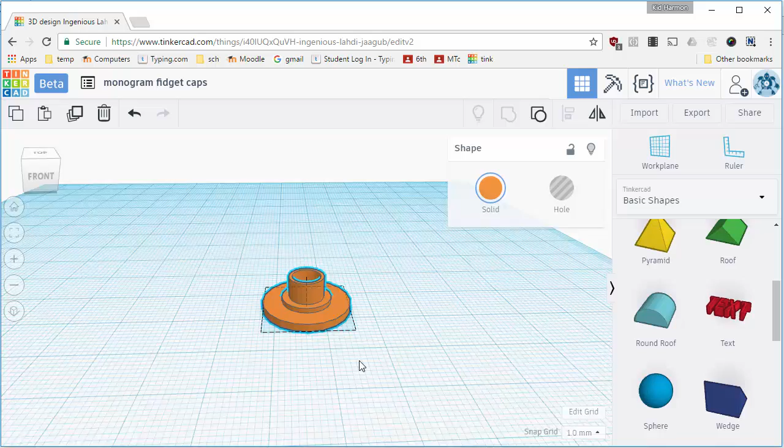Good morning, fellow tinkerers. I'm going to show you how to make monogrammed fidget caps.

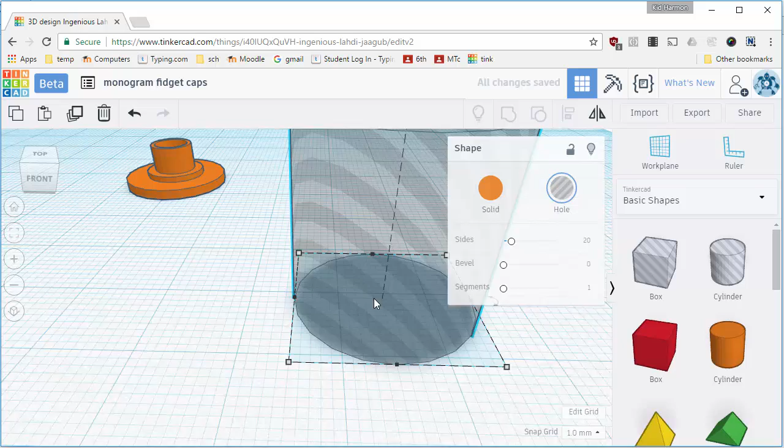Put your initials right in the center of your caps. We need to do it like this so that it's easier for it to print. I'm going to move this little dude off to the side and let's get started for how to build this. Start with a cylinder and also understand that you're going to put the letters upside down.

Make that cylinder a hole and change its measurements to 18. Remember to press enter. Press 18 again. Remember to press enter. And then for this one, we want to go 1.5 millimeters thick. Later, we're going to make our words 1 millimeter thick. That way they do not poke through.

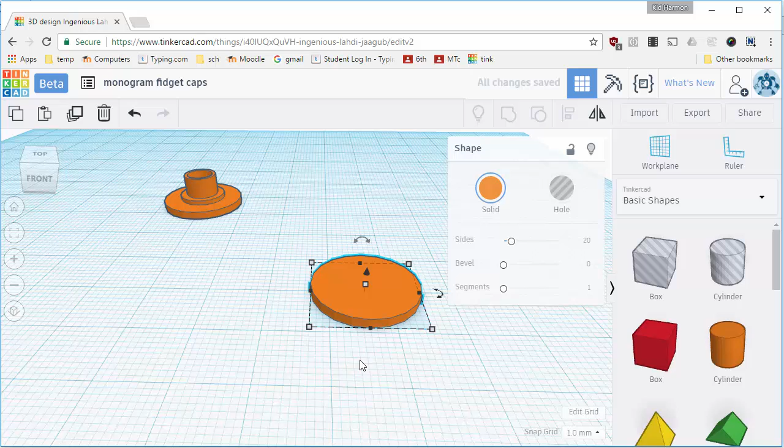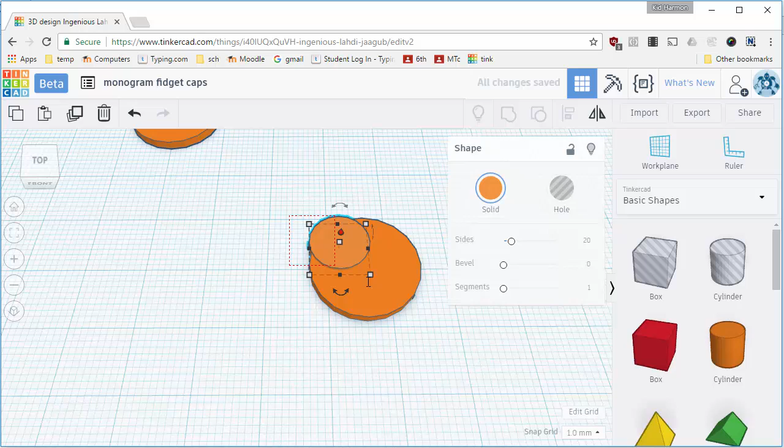Do Control D to duplicate that little critter and make the next one 10 by 10 and press enter. And then we want to make it 2 millimeters thick, so that way it gives us a raised up area when the spinners are going or touching the bearings. Use the awesome align tool to center it.

This tool is really cool for zooming to the exact size and looking from the top to make sure that you've got it the way you wanted. Then I always switch back to the front view because I prefer that. And now let's create one with a pin and one with a socket. Click somewhere else so you can get just on the center piece and do Control D to duplicate it.

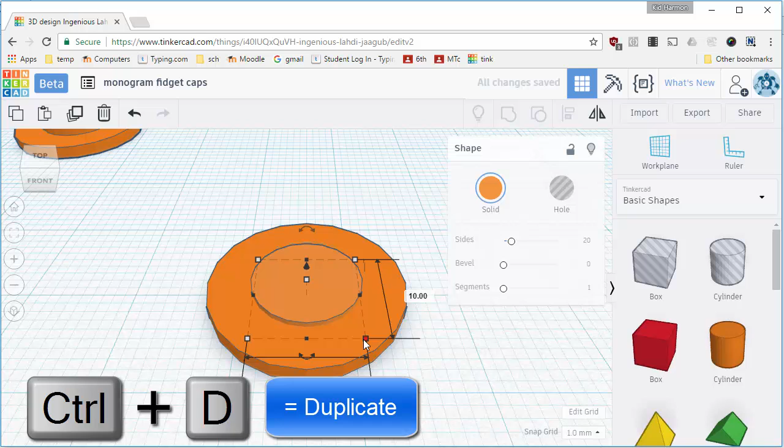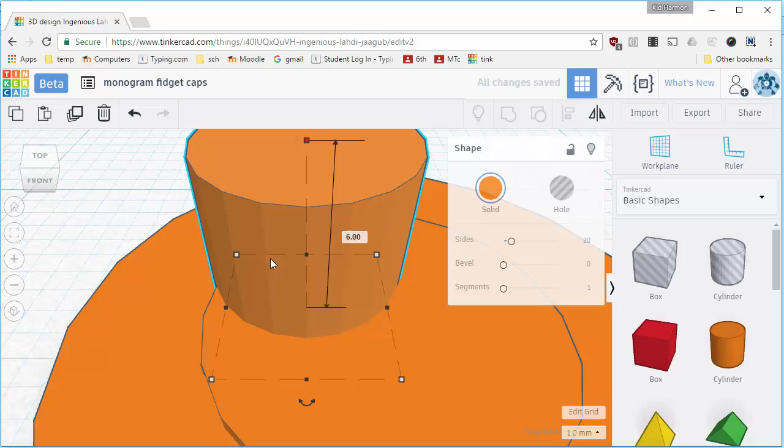This one we are going to change to 5.75 and 5.75. Make sure you press enter after you type those. And then we want it to be 6 millimeters high. Click 6 and press enter. And then zoom back out if you accidentally did what I did. I'm going to go top view so I can easily grab everything. I'm going to align those and center them.

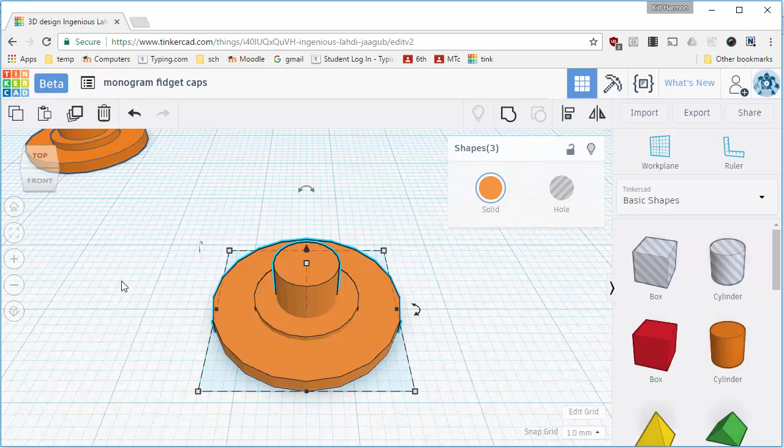Make sure when you do your align tool you've got everything selected, and when you do that fit view to selection, notice it moves so you are perfectly oriented and you can tell for sure that it is centered. That piece is now completed. So let's do Control D and use that piece to build our next piece. Slide it to the right.

And let's take our completed one and let's group it before we add the letters at the end. So if you wanted one without a monogram, right there's your spinner. This one we need to add a hole for the pin to go in. So let's start by making our cylinder larger. Let's do 7.8 and press enter, and 7.8 and press enter.

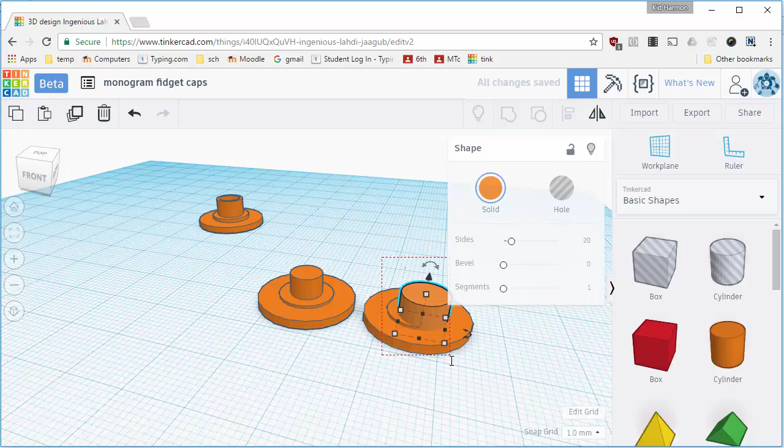Let's get those selected. Look from the top, choose align, click your line, click your line. Notice that is perfect. Let's click on just the center pin and change it to 7 high. Let's do Control D to duplicate that center pin. And we want to raise this one up 2 millimeters because it's going to be the hole.

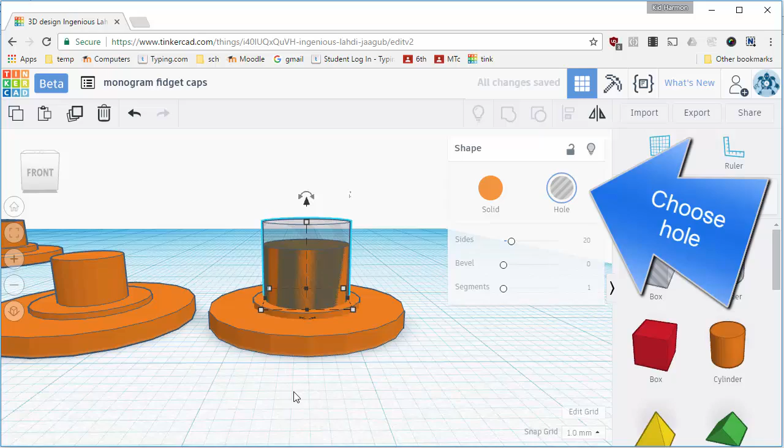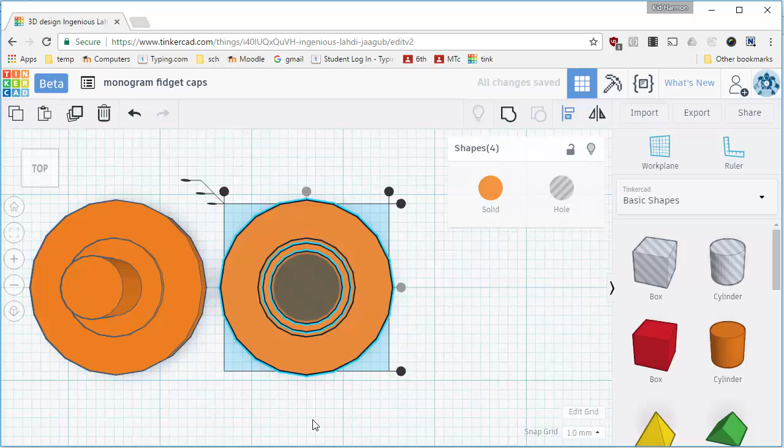Change it to the hole right now. And we don't want to cut through here because later we're going to put letters there. Change its measurements to 6 by 6. Select everything again. Let's look at it from the top. Let's do that real cool fit view to selection. Use align and pop those where they need to be. Notice we don't want to do this alignment because then it would cut out everything.

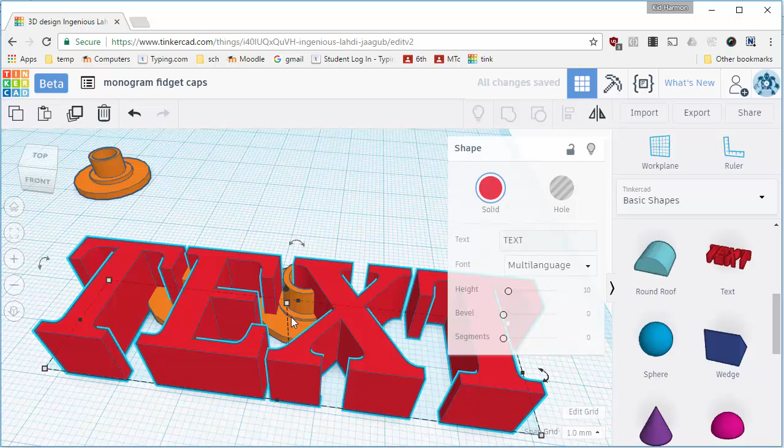You have just made your 2 cool caps. Let's group that so now they're ready. This one will stick inside here. And now let's do the monogramming. Find your text tool. Change it to be your initials. If you want to play with the fonts, you can. My initials are MH. Don't worry about the size.

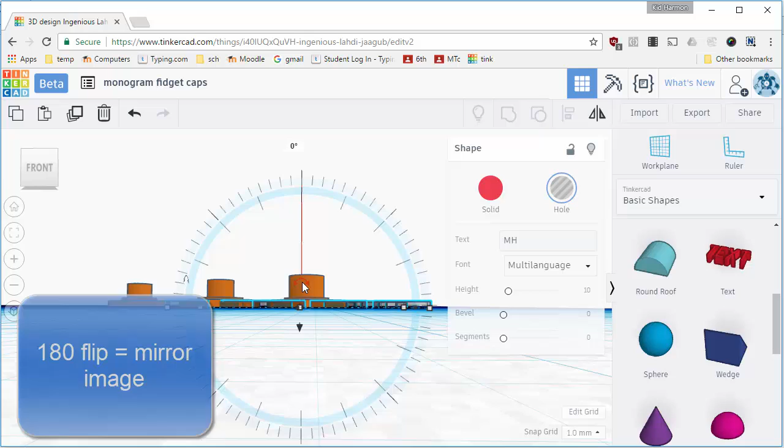Turn it into a hole. Change the height to 1 millimeter thick. Remember we went 1.5 millimeter thick on the original. And then we've got to change the orientation. We need to flip it 180 degrees so that it's backwards. And then later, when we flip these caps over and stick them where they belong, they'll be the right way.

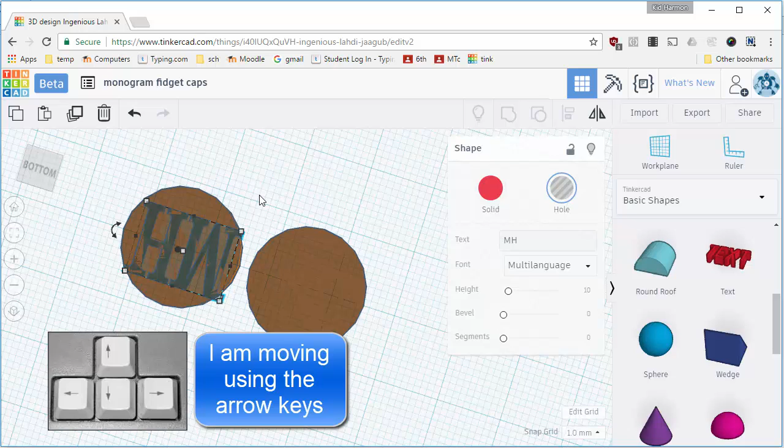Use the black handles to shrink it so that your letters are going to fit. You can move it from underneath so you can see it better. Notice that's a little bit too wide, so I'm actually going to work upside down. If you can't do that, just move your item out. When you've got it groovy, center it. Make sure you really dig it.

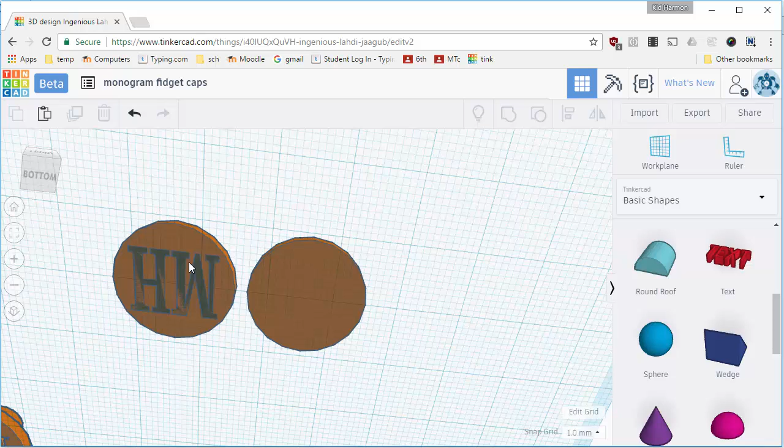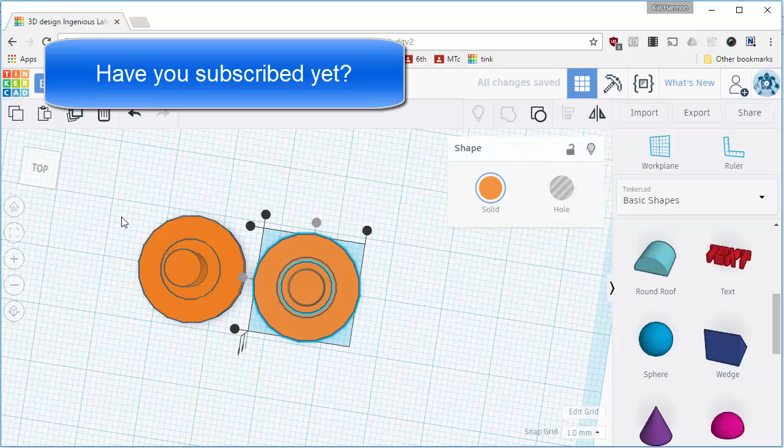Then do Control D to duplicate your letters. And move your letters over to the other one. And select all of that. Double check your alignment. Mine was already good. And now you can group your final parts. Cap 1 grouped. And now it's time for cap 2 to be grouped. And you can do it by hand, or you can use the cool little cube to switch.

When you look at them from underneath, you have now got initials with your caps. You can export everything, so both caps print at once. Of course, I would have a bonus one, or you can just do them one at a time, so you can have the pin cap and the socket cap, so you can print as many as you need.